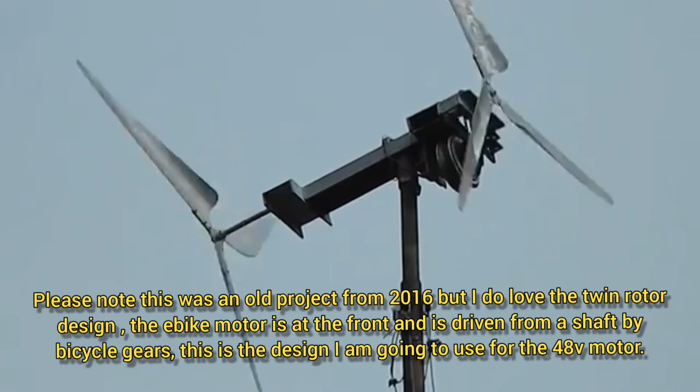And that's the motor hub that's making the whining. Yeah, look at that. I'm well happy with that.

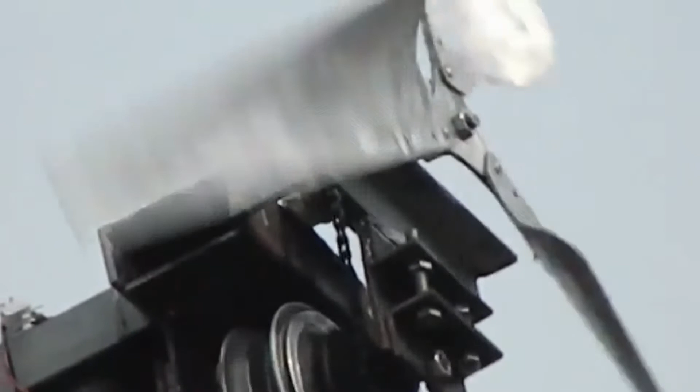It hadn't been spinning very fast because it hadn't turned into the wind properly, but because of how I wanted the design to not have a tail, that's how it worked. But now it's turned into the wind, it's really going round, and because it is producing electricity...

It's making that humming noise. So yeah, I'm going to do some testing on it. I don't know how much power exactly it's producing, but I'll find out. I'll put it up in the next video. Take it easy.

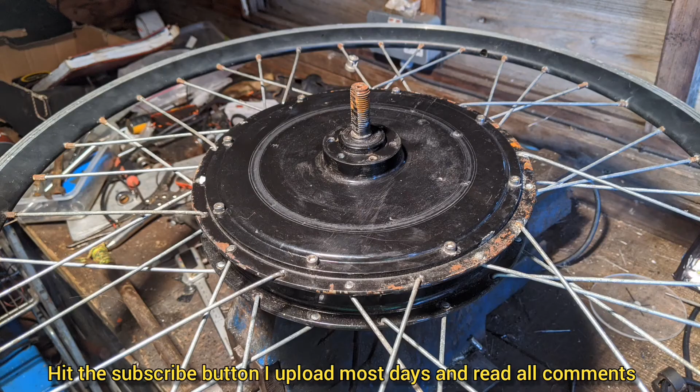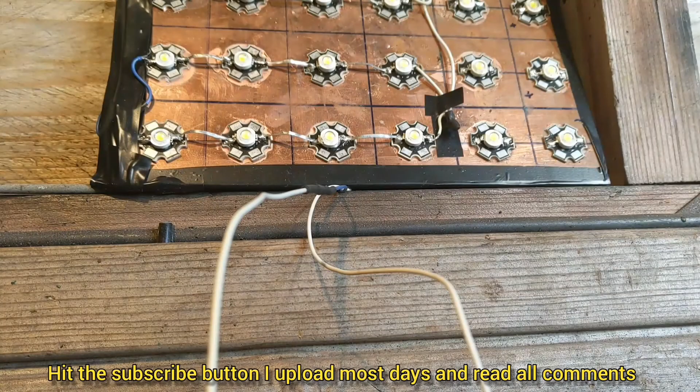Yo, what's up? Another video about what I plan to do with the turbine. I'm just going to show you. I've got it set up through the rectifier and through this meter and to the LED. Just going to put the camera down while I give it a crank or two. Get a pen, where's there, there we go.

So it's about 1.5 RPMs. The meter's only reporting 3 watts, which I think is a bit off, because I think that light needs more than 3 watts to do what it's doing now.

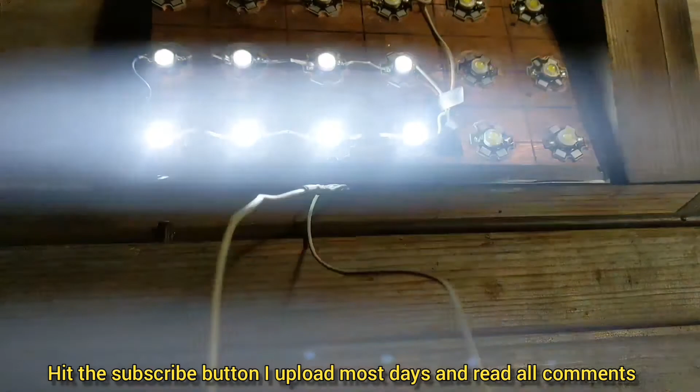So I guess that's another way you could test it if you want to. I'm just going to turn the lights off for effect. So yeah, that's that.

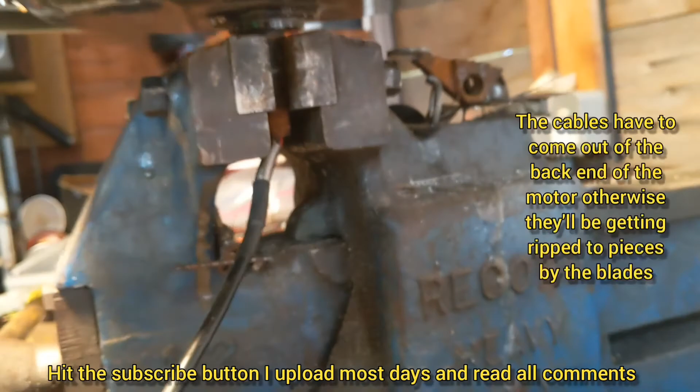And I also wanted to show you that I've got it in the vise. You can see that that has to be the back end of the turbine, and this has to be the front end. If we go up like that, and that's going to be looking at the front of the turbine, there's going to be a shaft around here.

Let me use a random bolt to show you where I mean. There's going to be a shaft coming out here, and this shaft, actually it'll be more like that, this shaft will have to have a gear on it which drives this turbine round. I'm already calling it a turbine, you know what I mean.

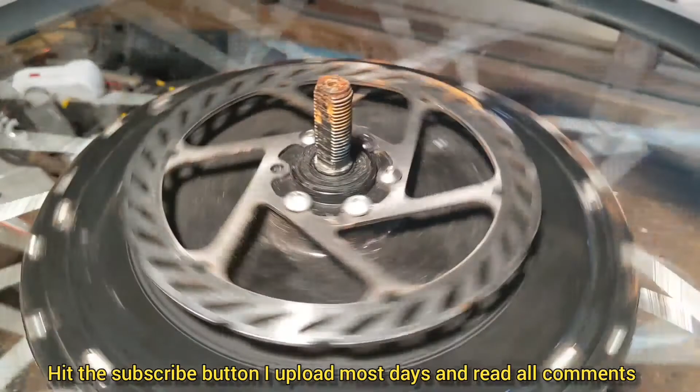So the original thought I had was to have some kind of drive belt going in here, which I knew wasn't ideal for quite a few reasons. So when I flipped it over, I was very happy to see this, and I was wondering if I'd be able to actually connect some kind of gear to this.

There's not enough room for it to take a complete derailleur, and that would be pointless anyway. Even if I could just get one gear on it, then that could work. Obviously the brake disc will come off unless it makes sense to keep it on there for whatever reason, which I can't see.

And then what will happen with these is these will be connected into a frame, so that can't move.

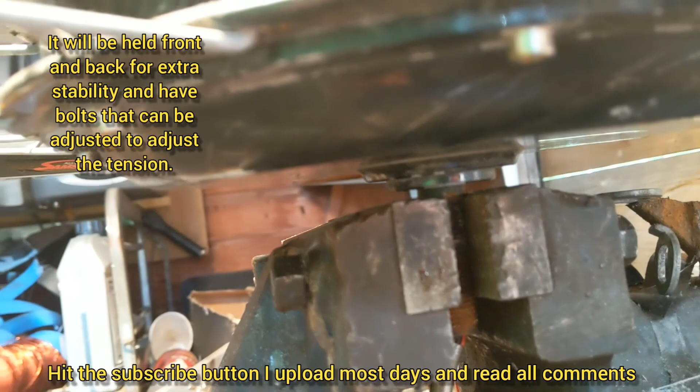You might be thinking, well, can't you have it the other way around and fix this and move this? Okay, you can't. I can't really think of any way to do that when there's a wire on the back of it, because then you'll have the wire spinning around like crazy. So these will slot in the same similar way that my other project did.

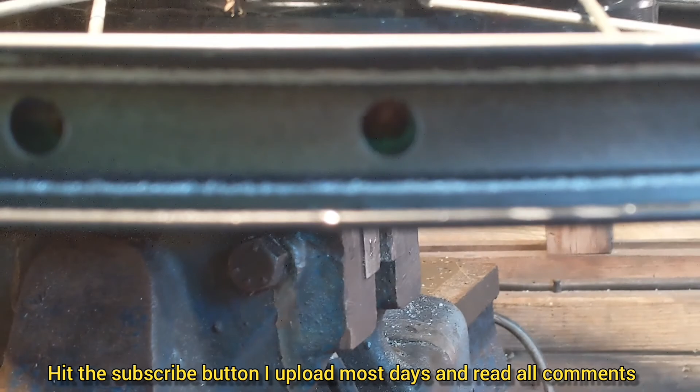And really what I'm going to have to do, because I'm serious about going ahead with the project, is to butcher the wheel. I was looking in here and there's just lots of rusty bolts, so I know it sounds pretty brutal, but I'm going to have to get the grinder out and chop the spokes off, so that will be the next step. That's what it looks like without the brake disc on.

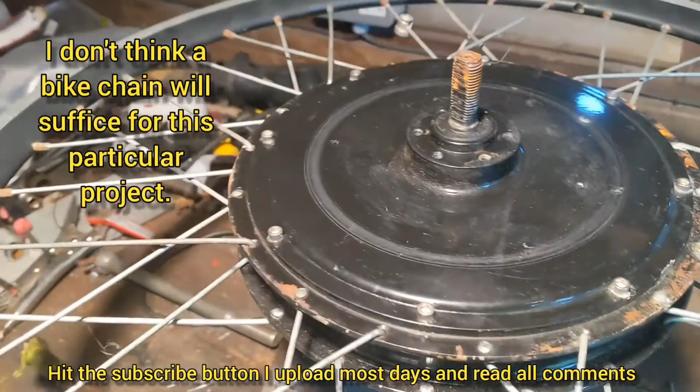A couple of bike gears, but if you look at the back, I think the only way I can connect this is if I keep some of the pedal block, which I don't think I can do, because it's really, in reality, it's all about these mounting holes, which are 44 mil apart.

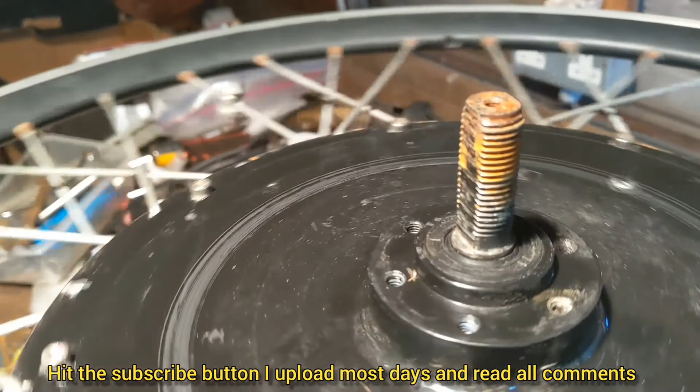So something, a cog, needs to connect to this somehow and then turn that like so. This, obviously, as I keep saying, is going to be fixed in. You can't have it any other way because of the wires, unless you could knock up some slip ring malarkey.

But yeah, so that's what I've got to do, is I've got to suss out how to connect a gear of some kind to that. I'm not sure if a normal bicycle chain will be any good.

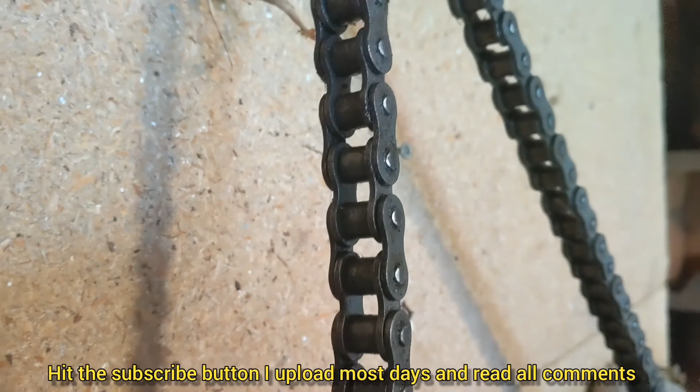This is some chain I bought for another one of my projects. I'll just grab that, I can measure it for you. See, this stuff's quite beastie.

It's 15 mil wide without the little pinion things. If I try and measure it with a pinion, it's about 16 and a bit. No, it's actually 17.

Yeah, I basically really need to try, and if I want to do it, I need to get 2 sprockets for that. The shaft on the top of the turbine will have the big sprocket, I think, and this one will have the small sprocket. I don't want to make it too difficult to turn.

Problems I've got there is I might have to use washers, because I don't want to have to be cutting a perfectly circular hole out this size. So I'll probably use washers to stagger it a bit. And then I've got to try and find some sprockets online, whatever.

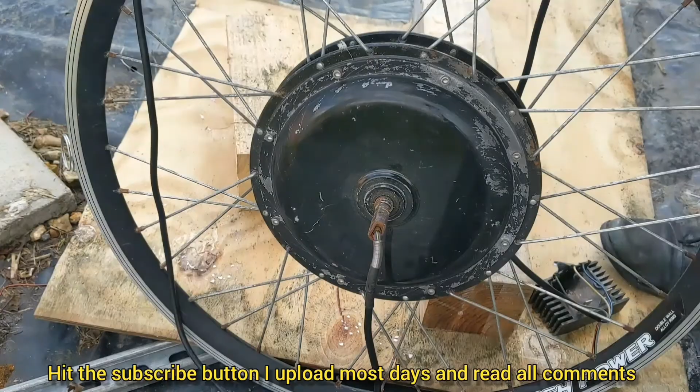As unbelievable and as wantonly destructive as it seems, I'm going to have to despoke this wheel, and I can't really be arsed with taking all the rusty bolts out. So I'm just going to hack all the spokes off. I'll put these 2 blocks of wood here to stop the bottom cables touching the floor.

Yeah, where's that grinder?

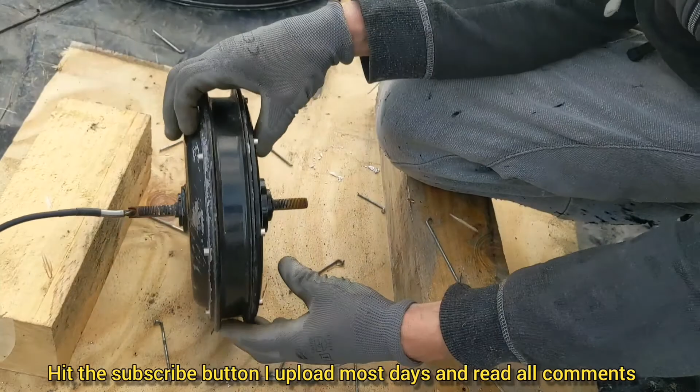Feels a fair bit lighter now. It's hard to turn. So yeah, that's the motor itself.

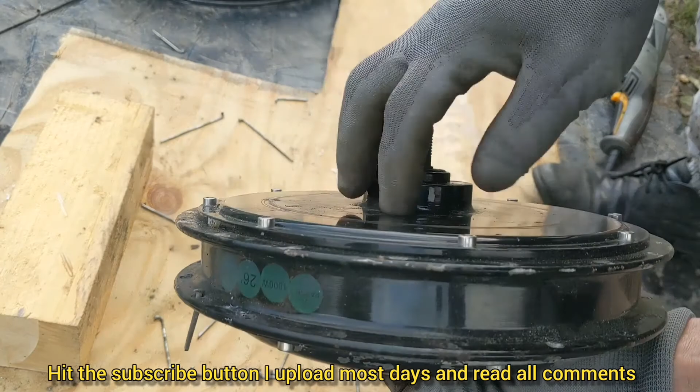That will be the back. This will be the front. And it will slot into something that will hold on to the two spindles. Oh, one more little bolt.

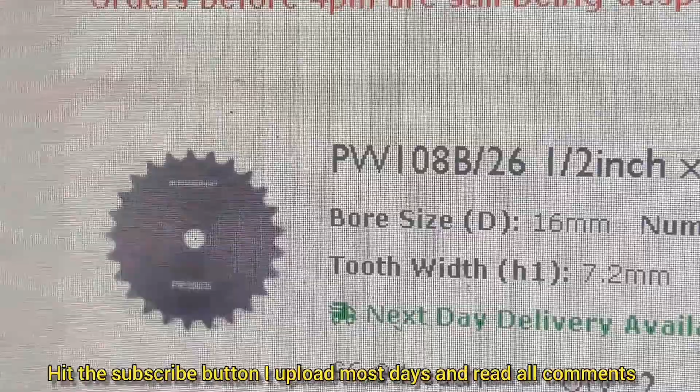So these are the bearings I've settled on. I'm going to use both the same size, not the bearings, sorry, the gear cogs. I'm going to use both the same size. You see the tooth width is 7.2, I've measured that, that's fine.

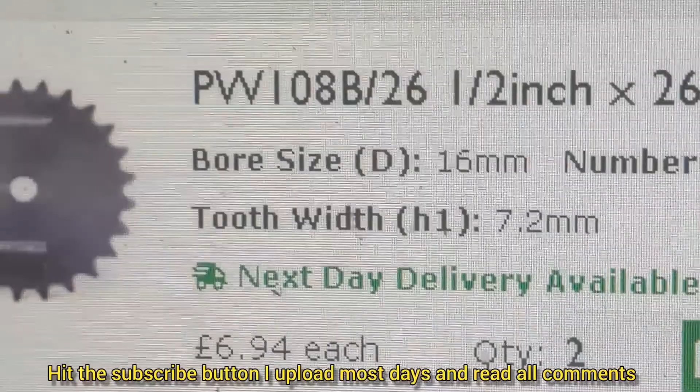The bore size is 16mm, so that'll just fit over the thread completely. Number of teeth 26. So it's just going to run similarly from 26 to 26, so there's no gearing in it per se. What I need to do is make it so these can be taken off, and I can change the cog size which is on there.

You'll notice the bore size 16mm, it's all down to that. You can't have a big bore with a very small amount of teeth for some reason, or else I would have bought another one. So anyway, I'm getting 2 of those.

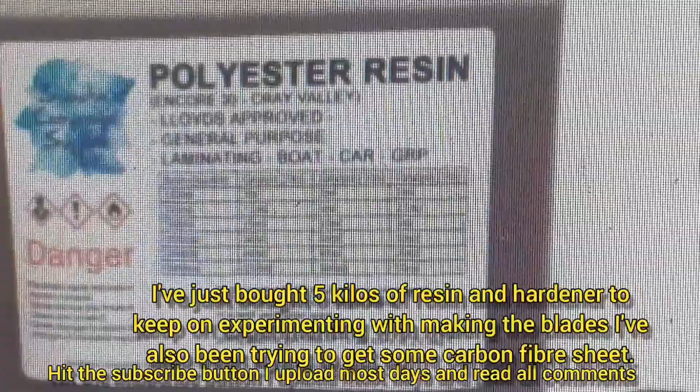I've just bought 5 kilos of this resin, and I've got 100 grams of hardener coming, this stuff. I'm buying 2 of these with a 20mm bore size, which is that big hole there, and that's because I've got a meter of 20mm steel round bar, which I'm going to use for the shaft, for the blades to go on. So that's £5.55 each, so that's £11 for 2 of them, which is pretty good.

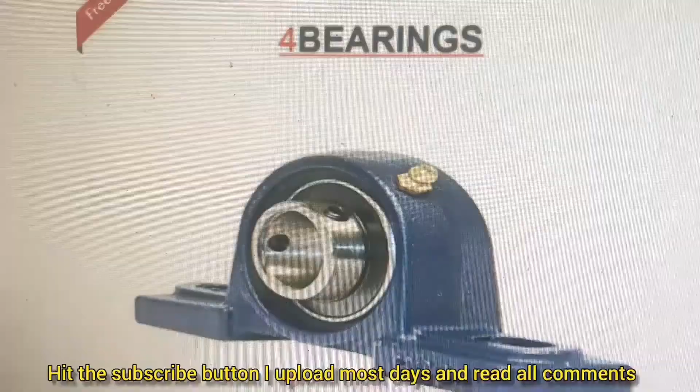And you'll see they've got the little Allen key bit where you can tighten up, so the shaft will go from the front to the back of the machine. 2 of these will keep it perfectly straight. You can see the little holes there. You can either bolt them down or weld them to the frame. I'll be doing some drawings at the end of this video, so you know what I mean.

These are the blade hubs that I'm going to use, although these blades are 28 inches and I'm hoping to make a set of the 35-inch ones, so that'll be cool.

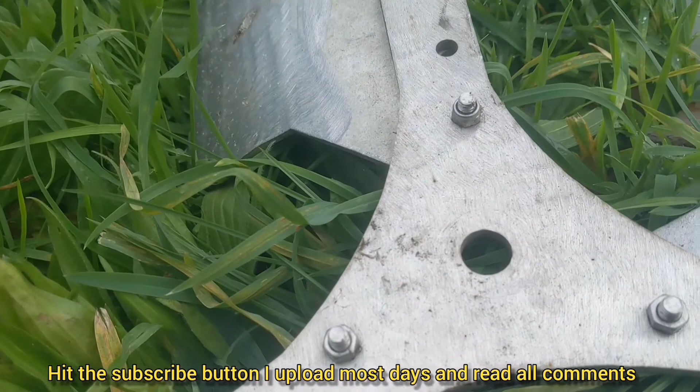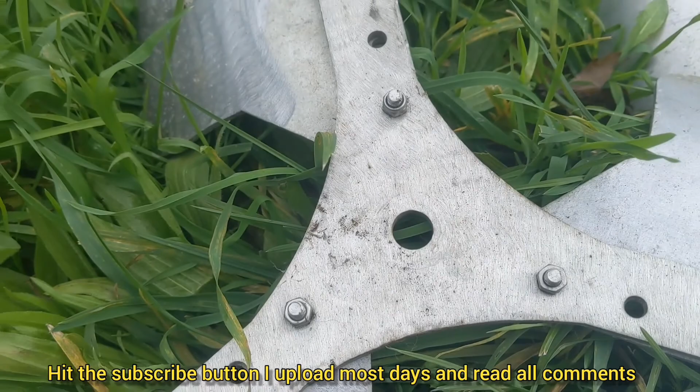What I'm going to do with this is, on here I'm going to weld a tube about 1 inch tall, which will fit over the shaft, and then the tube will have to have a hole in it for which a bolt can go through the center of the shaft, and it can be all tightened up. So there's going to be one set on the front and one set on the back.

So this way is facing front ways. Is that right? Or have I got that wrong? No, that's got to be front ways, isn't it? Anyway, we shall see. Yeah, that's got to be front ways.

So yeah, nice. The reason I've gone with a 16mm bore is that is 15mm, that little bit that sticks up.

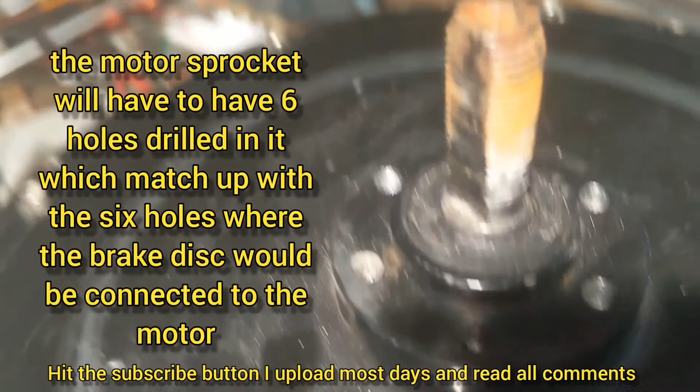The width of that is 15mm, so the 16mm will fit just over that, and then I'll have to drill 6 holes in the sprocket to hopefully line up with these. And that's our sprocket bolted on here.

Job done. Just a bit better look at the chain I've got, which is 1/2 inch simplex, very strong. So that's what I'm going to use.

The tooth width is 7.2, I know that anyway. No, I'm showing you that. So the width of the teeth on the sprocket will fit in there, and it will fit that way.

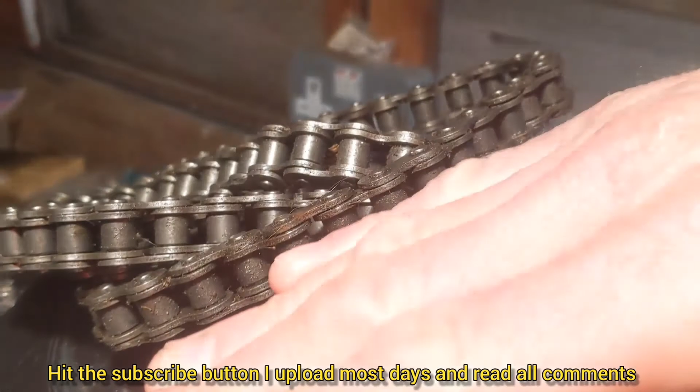So yeah, that's cool. Just found a couple more blade hubs. That's a 5-blade one, and that's another 3-blade one, although I think that one's a bit bent. But what is bent can be straightened, so maybe, yeah, I quite like that 5-blade one. I think I might have 5 blades at the back and 3 at the front.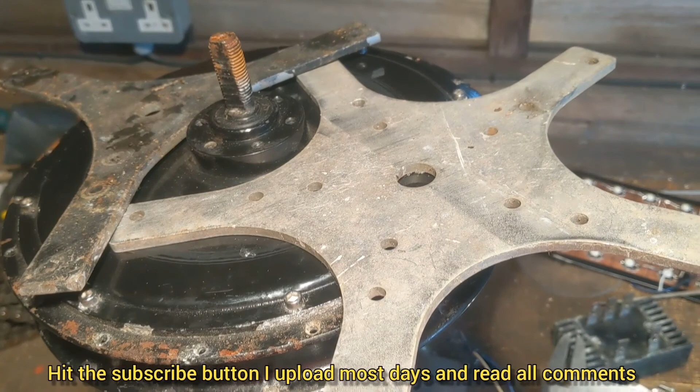And then theoretically, because it causes more drag with the 5, that would be the best one to have at the back, because I'm going to have the shafts kind of offset. I'll show you in a drawing.

So this is a rough drawing I've done of the design, and you can see that's the blades at the front, that's a set of blades at the back, which is not drawn to scale, because in a similar way to the fact that the tailpipe, the tower pipe here is closer to the front end, the blades will be over here somewhere.

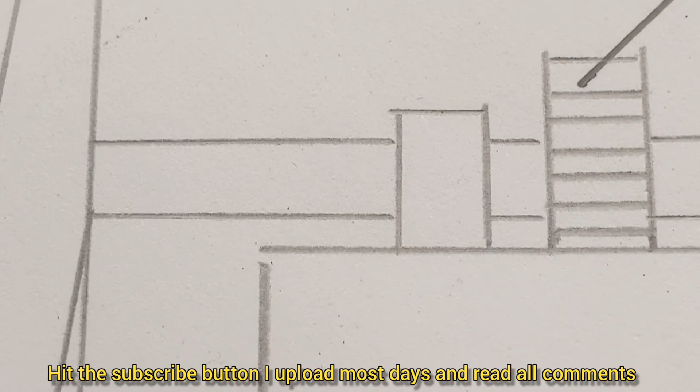Okay, so it will be offset. The front blade will be as close to the front of the frame, this is the frame, as possible. This here, that's going to be the front bearing which holds the shaft.

This thing here is depicting the gear sprocket, which will be connected to the shaft here somewhere. I'm going to try and do it so they're interchangeable, but we'll have to see.

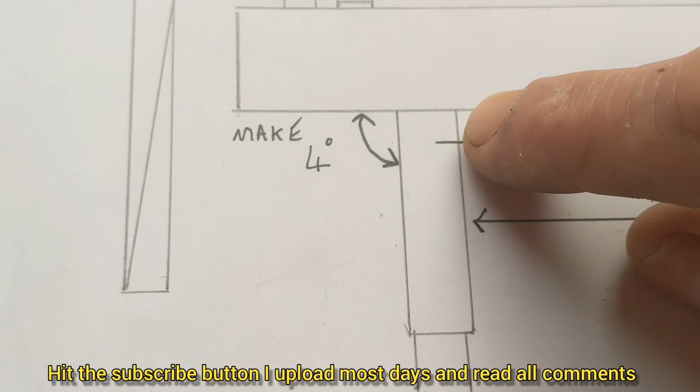With regards to where this joins on, that may have to be at an angle of 4 degrees, which will then cause the turbine to face up a little bit.

Okay, that's just showing you the top of the tower. The motor will fit in here and is not shown in the drawing. So the chain will come from there down to here and go on the front end of the motor.

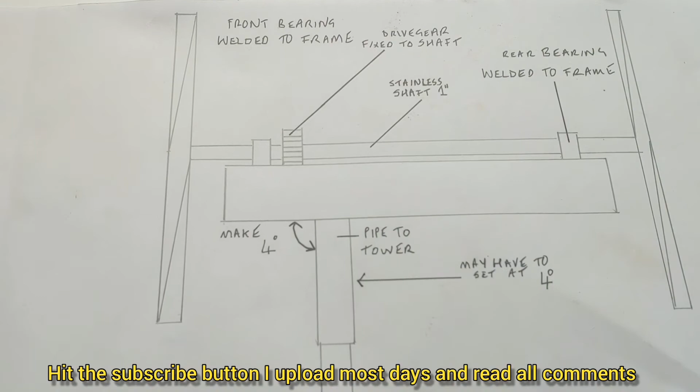So I'm going to do another drawing with that on. But that's basically so you can see how it is, because it's closer to the front. If I was to do that, it may tip up a tiny bit anyway, because you do want it poking up even from the Hugh Pigott thing, and so the motor would come out at a tiny bit of an angle. I'll do another drawing and show you that.

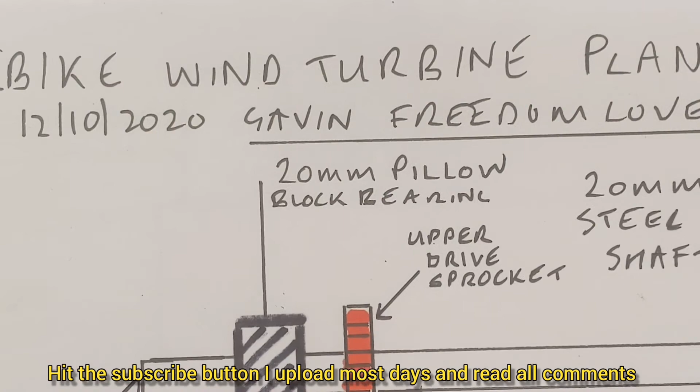So this is a bit of a better drawing, I think, showing it. So you'll see the shaft going all the way along the top of the turbine. There's the rear bearing, just there, and there's the front bearing that holds the shaft in place.

The upper drive sprocket is also on that shaft, directly above the sprocket which is on the motor here. What I've done in red is to show you where the chain's going to go, and from the top there's a hole here so the chain can run through.

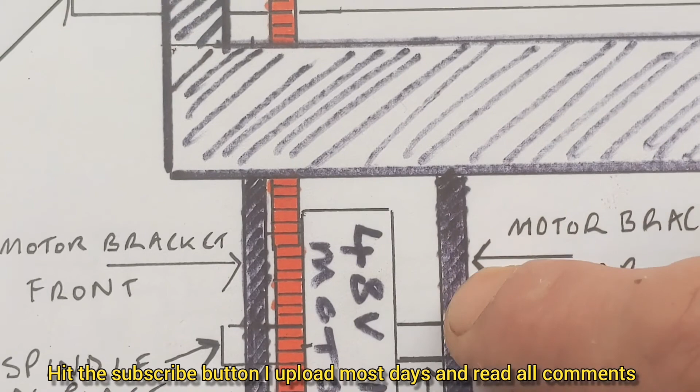These 2 brackets, which will be adjustable, will hold the motor perfectly in place and be bolted or secured at either end so they can't come out. The bolts attached to this will also sort out the tension.

And what isn't shown here, sorry, I've just done that to show that's the end, the power wires will come out. What's not shown here is the tailpipe, which will be somewhere here. I'm not sure whether I've got to angle the tailpipe up a little bit, so I didn't show you that.

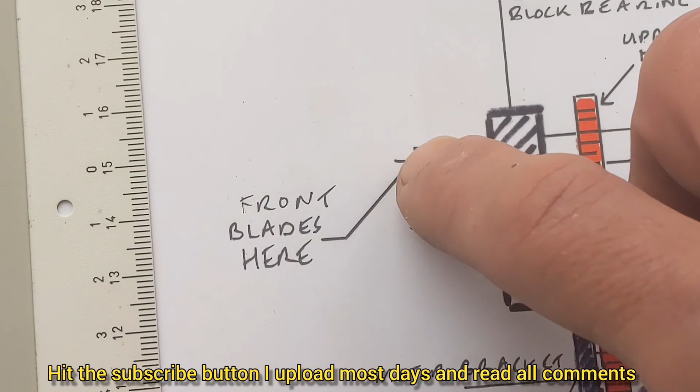So the front set of blades go on here, like so, thank you Sharpie, and the back set of blades go on here, like so. And yeah, I will do some more drawings showing you it from the front and stuff, but that's basically it.

Show everything close up again.

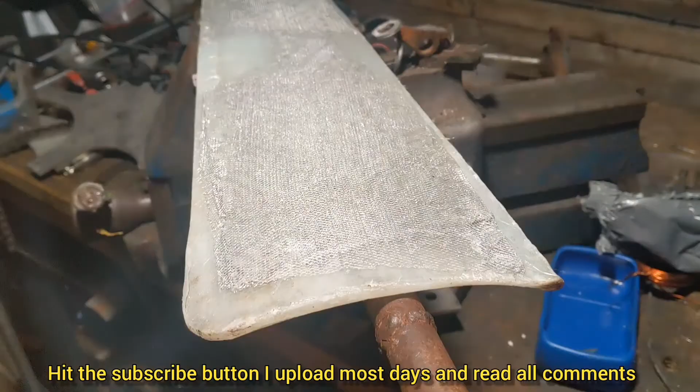The reason I need the resin is to carry out further research and improve my blade making skills. I've got to make a set and see if they work, and then I'll be using them hopefully on this new project. This is the shaft I'm going to use, which, as I showed you, is a lovely rake that I've made, but that needs to go. It's going to be cut off down the bottom, and also just here where it was joined, and that's going to be the shaft for the blades to fit on.

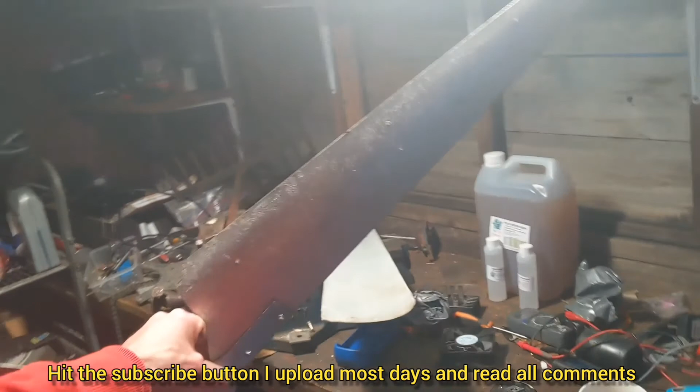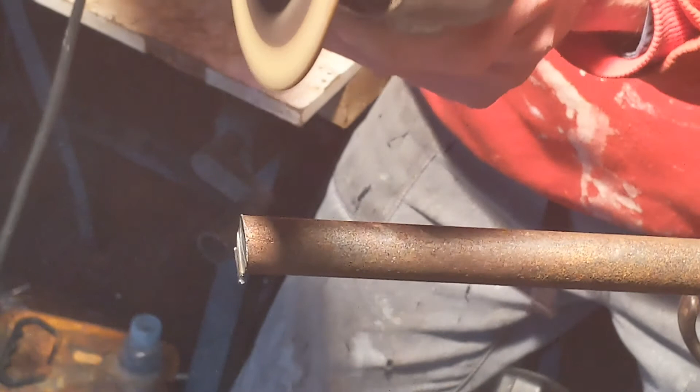I just missed my foot.

This is one of the old gears of my vertical axis turbine that I made. This sat at the bottom. These arms were attached to each half of a barrel - one half barrel here and one half barrel there.

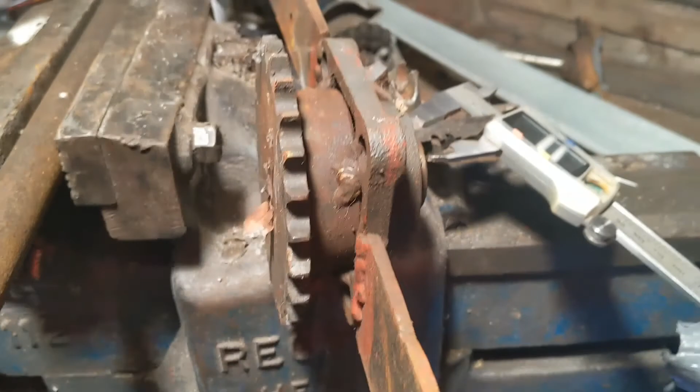So anyway, I just thought I'd show you that, because these sprockets that I've ordered don't have this great chunky thing on the back. That means it's going to be easier to drill the bore. Now there you go, the width of the teeth is exactly 7.2.

Got a load of wet and dry, so I'm going to use the sandpaper to clean this up a bit.

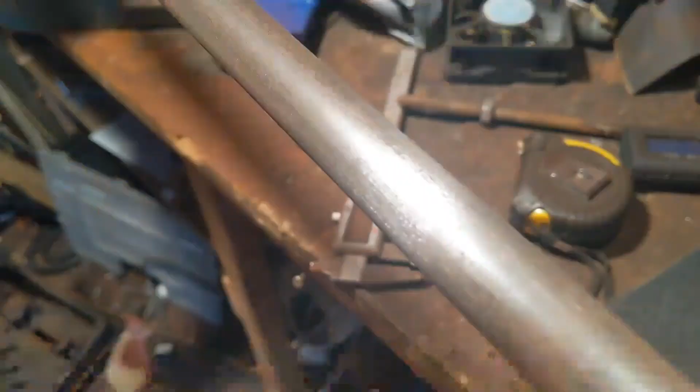That's a lot better now. It has to be rust free if you want to put something over the top of it. The sprockets are going to need to go - the top sprocket, the drive sprocket, will be about here, and the motor will sit underneath it. So these ends have to be nice and smooth so that the 20mm whatever can go over the top of it. It doesn't matter if there's rust on it elsewhere - if it goes rusty, it won't make any difference to the strength whatsoever. But you don't want to be messing around.

The plan is I'm going to put the bearings on this and then bolt it down. Then if I want to play about with this whole assembly with the propellers, the chain and everything, all I'll do is unbolt it from the frame, and unbolt the pillow block bearings which go there. So yeah, it's a bit of progress. Still waiting for stuff, but peace.

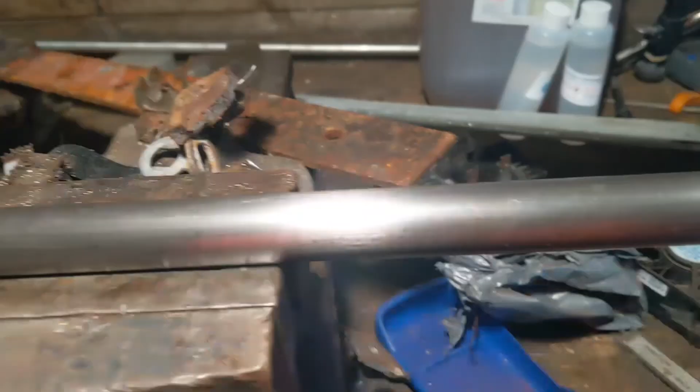So yeah, I've just given it a coat of WD-40 and a rub. Looks a bit better, don't it? But that is the shaft.

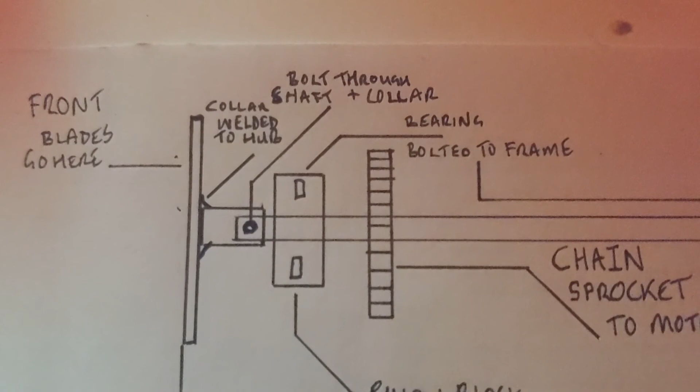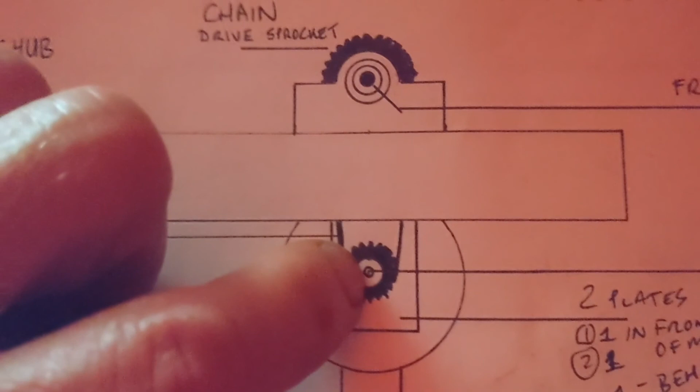This is kind of a front view of how it's going to look. That's the pillow block bearing. The shaft comes through the middle there. This is the sprocket that's connected to the shaft, which is going to connect to a chain, which is going to come down. This is the motor. There's a spindle in there, and when the blades turn, bingo, the whole of the motor will turn. The spindle will stay stationary, and the whole of the motor will turn.

So this will be a metal plate whose job it is just to hold that spindle exactly in the right place, and there'll be a plate like this behind the motor as well. There's the tailpipe and obviously the tower. There was one other thing I wanted to say.

So just the front blades going on here, rear blades going on here. It's offset quite far back, so the frame will take up exactly that amount of space. And you can see I've deliberately offset the tail to the back.

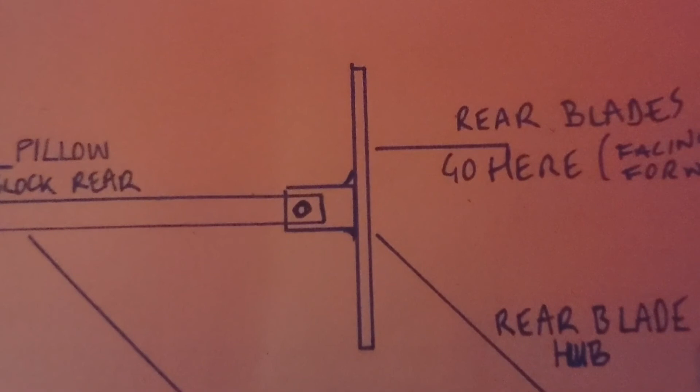That is a bolt which will go all the way through the collar, which is welded onto the blade hub, and then it will have a nice strong bolt that goes straight through the middle of the collar and the shaft. So yeah, that's about it. When I get the sprockets, hopefully tomorrow, I'll crack on with some more.

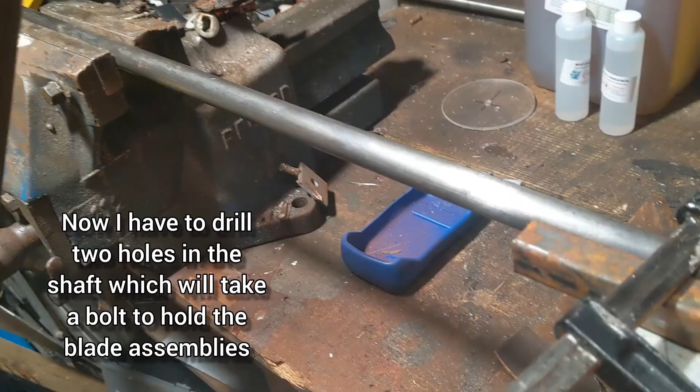So there's the shaft that both sets of blades are going to go onto, and I've got to drill a hole which has got to be right on this centre line.

It doesn't matter if it's exactly that far up. All it's going to be is there's going to be a collar welded onto the blade hub, which is going to slide on over here, and then it's going to have a hole in it which is going to line up with this hole. A bolt will go from one side of the collar all the way down through the centre of the shaft, out the bottom, out the other side of the collar, and have a bolt go through so they can't slip or move at all.

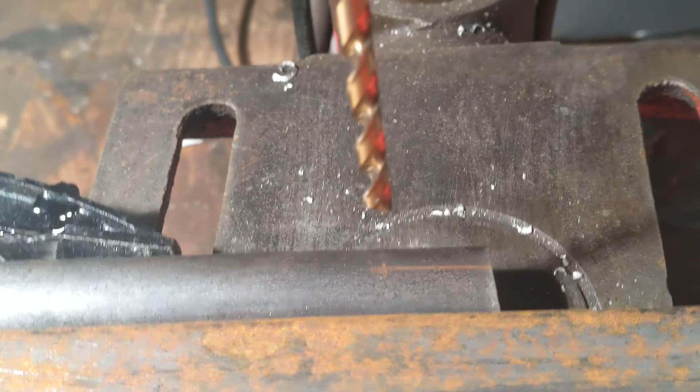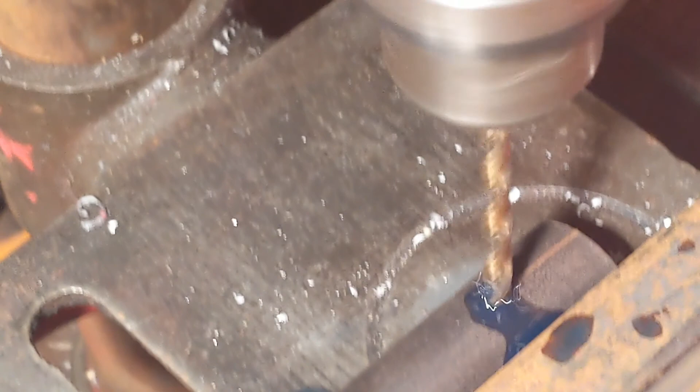So yeah, I've got to get this drilled. Bear in mind as well, these clamps are absolute doo-doo, so don't be surprised if they start flying off. Syringe with 2-stroke motor oil is what it'll have to be, I don't have any specialist oil. I was always told to drill metal at the slowest speed possible, which is what I do. This is a pretty old drill bit, so far so good.

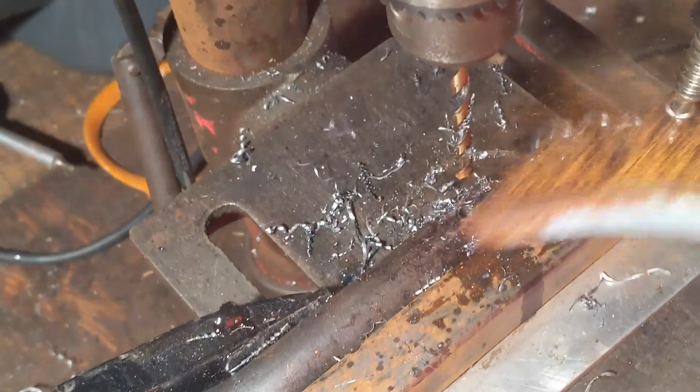That weren't too bad, folks. That was not too bad at all. My wire brush needs an upgrade. Yeah, you can see the hole there, so that goes all the way through, and then I'll put one on the other end.

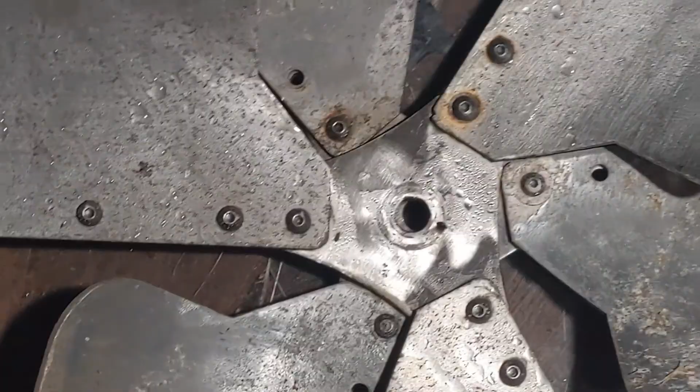The hole doesn't have to be offset, but the hole that goes on the hub will have to be offset - you'll see what I mean in a bit. What I've had to do to mark it up is I've got this 20mm steel block, so it's the same size as that. All I've done is I've set the calipers for 10mm, so that should give me the middle.

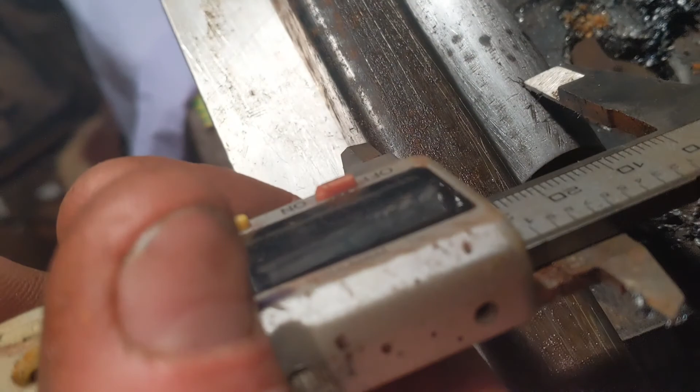Right, should be good. I've put it at an offset of approximately 60 degrees to the other one, but we can deal with that later when we're designing the hub collars, because it'll all be matched up when I make the collar.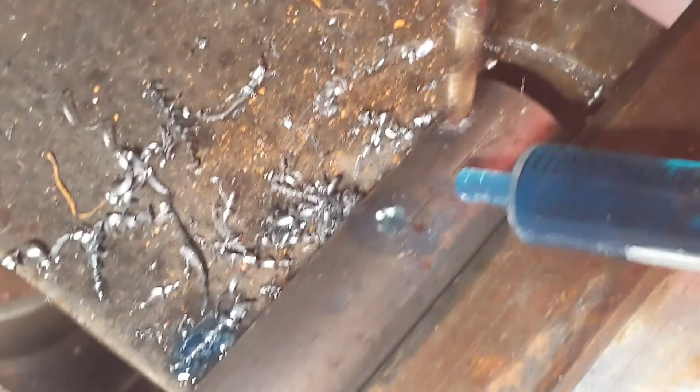Again, when I'm drilling, it's all about taking it nice and easy, saving the drill bit - you don't have to thrash through it. Keep using a bit of this dirt cheap oil, you don't have to use special stuff. This is just 2-stroke oil.

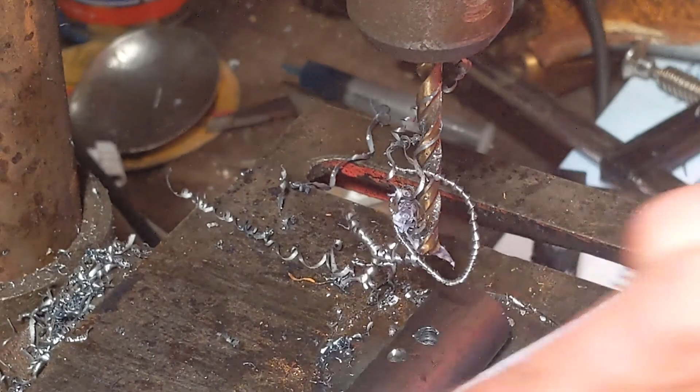Look at that. So that's one end - see, a 5mm hole goes all the way through. And the other end.

So yeah, that's not bad, even though the parts haven't turned up - that's one of the jobs I would have had to do. The gear hub is going to be mounted about here, and I have to decide a way of mounting the gear hub. I may well use a collar, but anyway, I'm thinking about that while I'm waiting for the bearings to turn up. So that's got the shaft sorted.

And yeah, that's a bit of progress. Just gave the ends a bit of a clean up, and that's what they both look like. Peace.